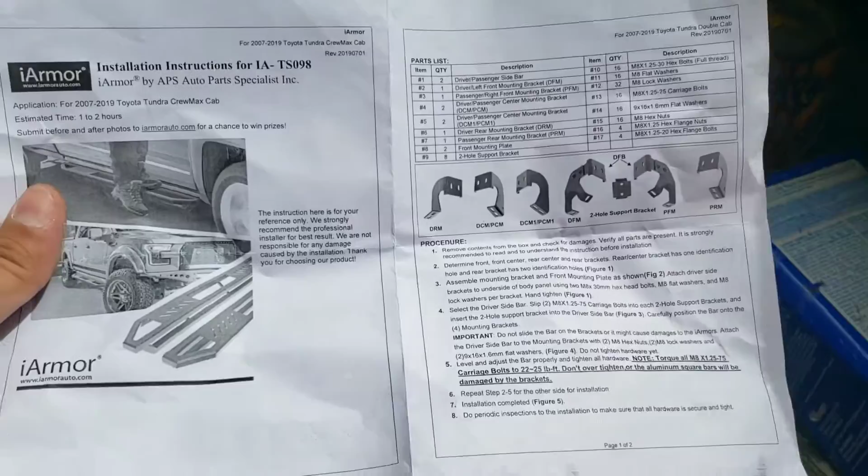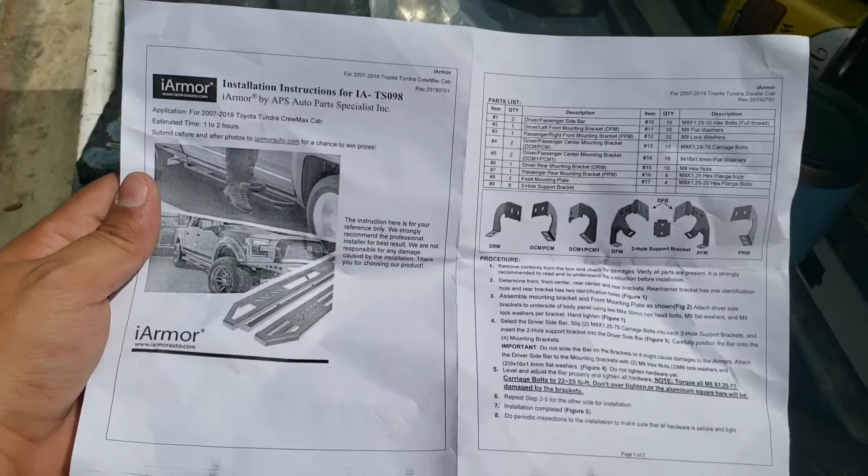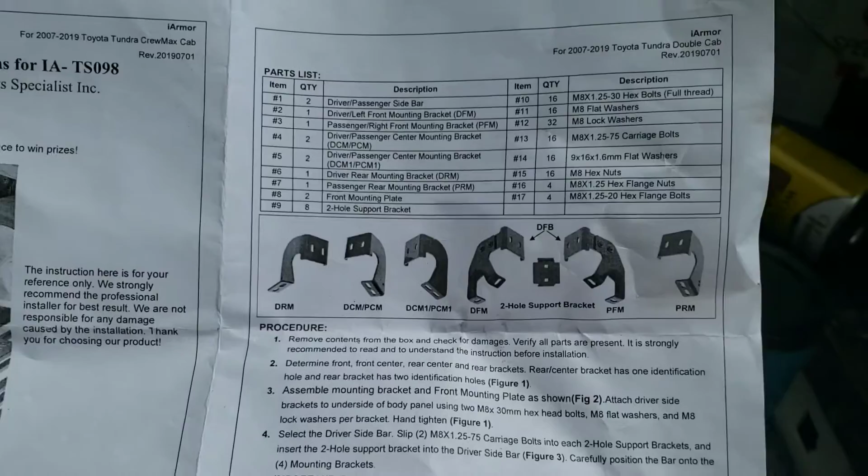Alright guys, so we got the instructions right here. It was inside one of those smaller boxes. So we got the 2 steps, brackets, and then I have all the screws here that we're going to need. So here are the instructions, and these are for a 2007 to 19 Tundra CrewMax. Make sure you got all the stuff, all the quantities that you need, and the instructions are there.

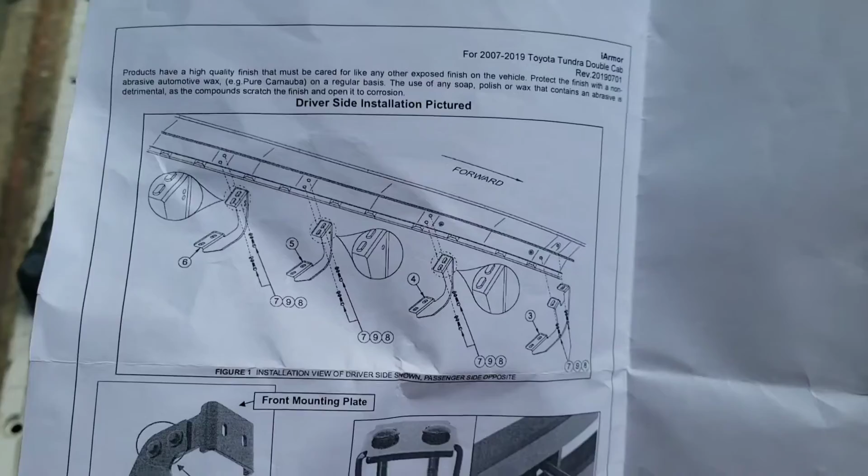And you flip it, you'll be able to see how it goes to the front side and how the front mounting plate goes. I'm pretty sure the install is very similar to the Silverado ones that I put on the other truck. So we're going to go ahead and assemble the front bracket plate and go under the truck and see how they're going to go.

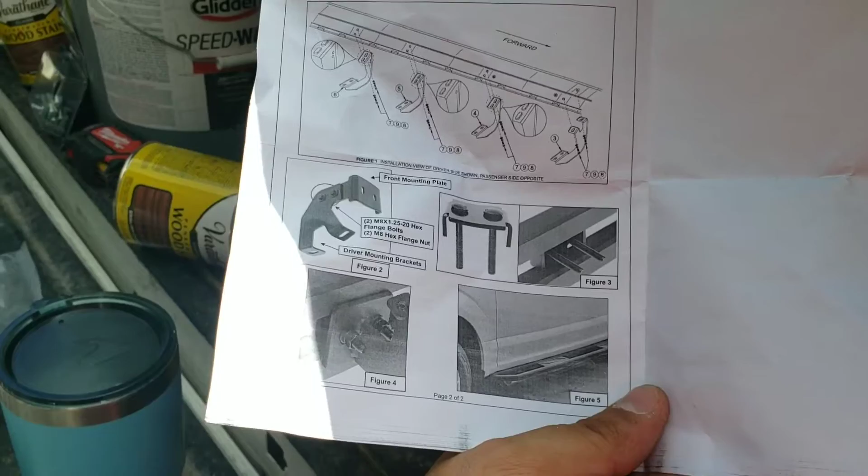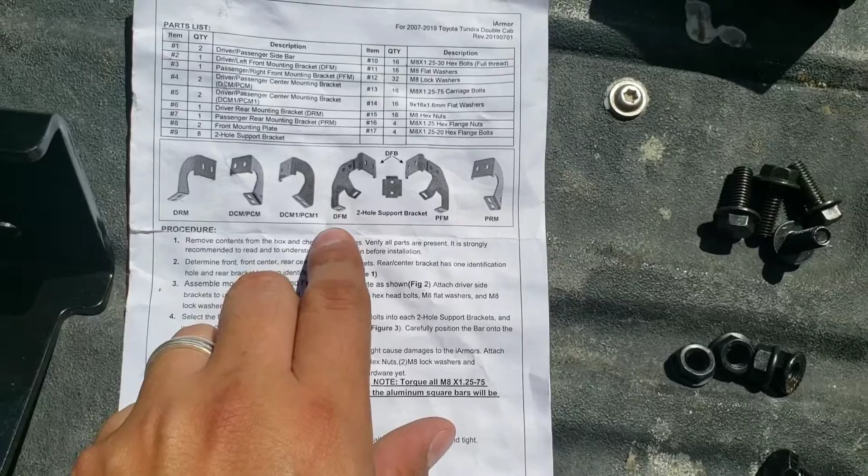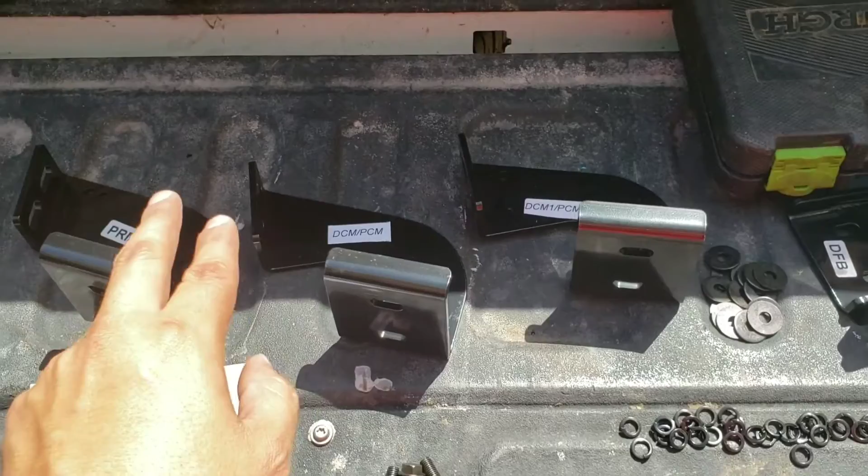Alright guys, I separated all the stuff, all the bolts, nuts, washers, locking washers that they included. First things first, we're going to assemble the front 2 brackets. I had already put them all in order: driver's rear, driver's middle, back, or either one of those. I don't remember which one's for the back, but one of those 2. I think they specify which one it is by the little hole they put on the bracket. The one for the front is 2 pieces. Same for the passenger side: passenger rear, middle, middle front, and front. So what you're going to need is 2 bolts of these per side.

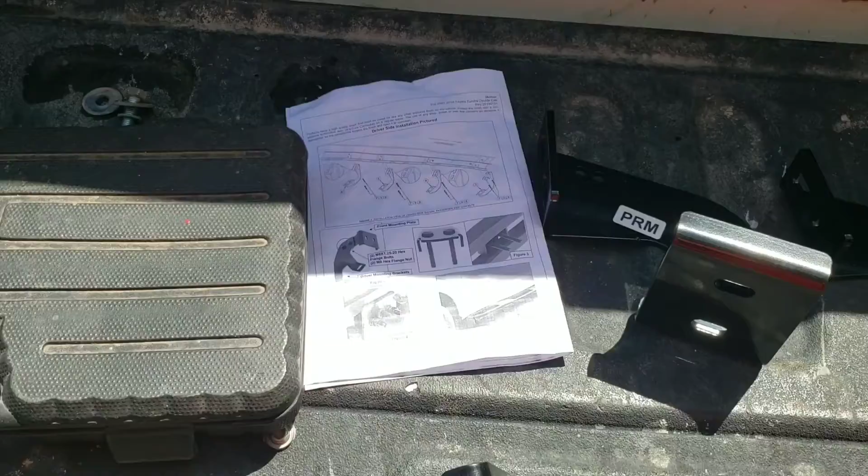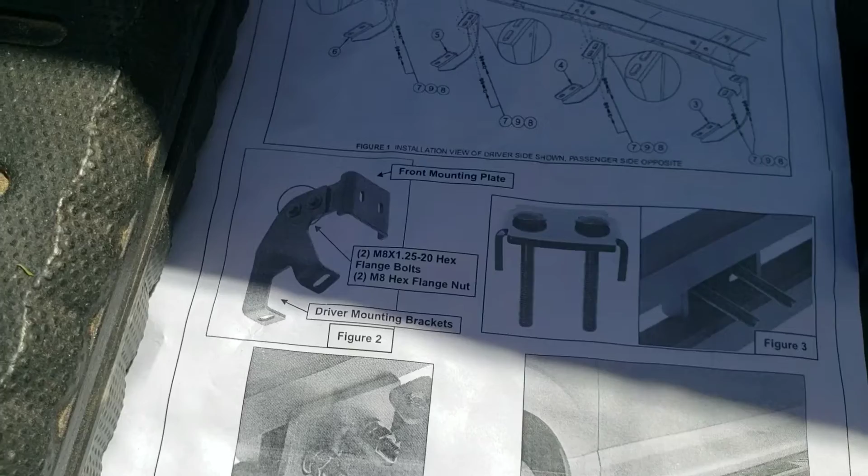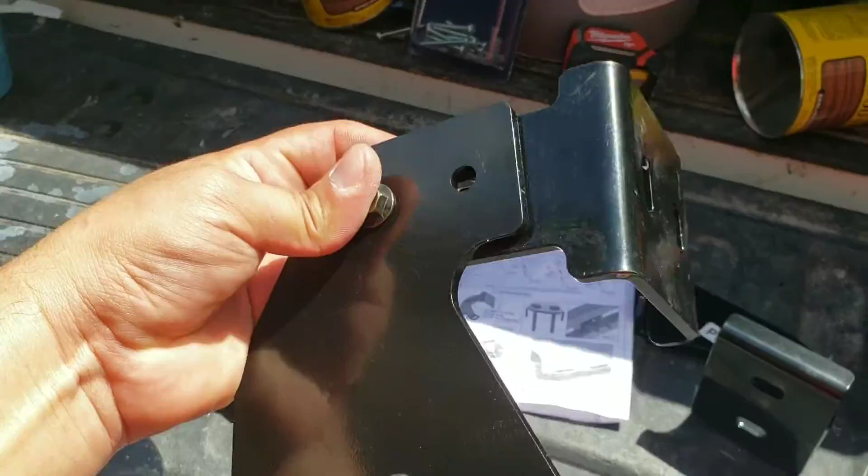Alright, so we're going to assemble the front bracket like it shows there for both sides, with 2 M8 by 1.25 20 hex flange bolts and the 2 hex flange nuts. So you're going to have your bracket like so. You're going to put your bolt in there, and grab one of those nuts per bolt and tighten that up.

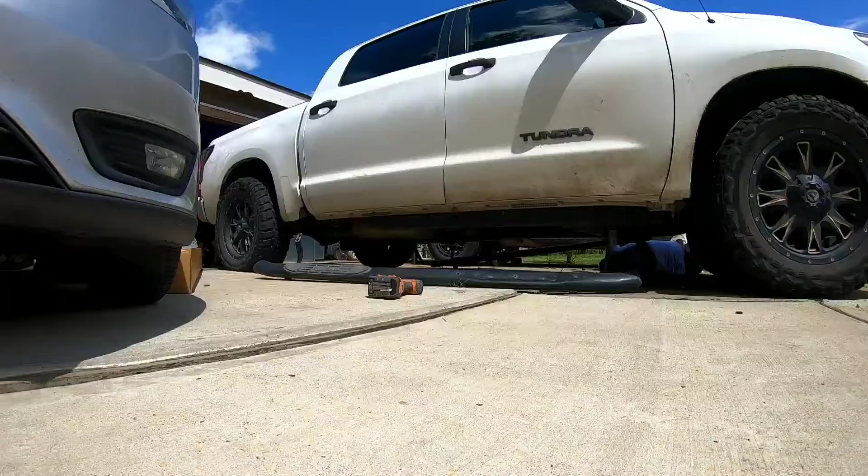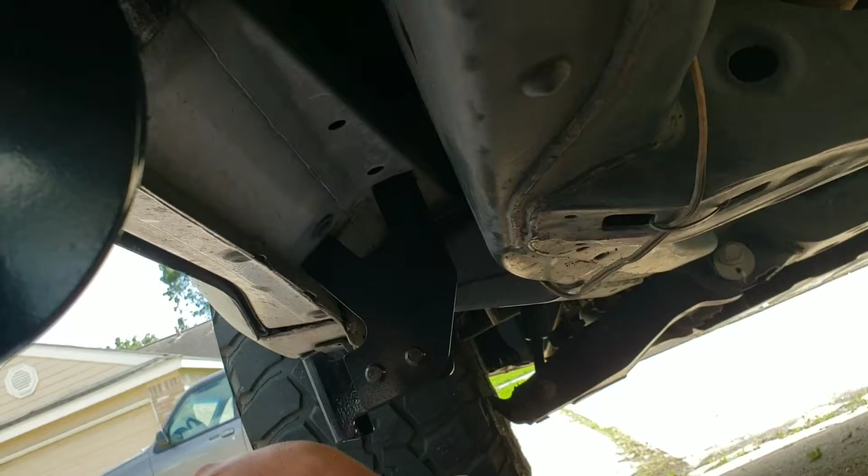Alright guys, we came to do the driver's side brackets. Here we have the furthest one to the back. The truck already comes with the nuts on the rocker panels. So you have the center one, and then you have the other center one, and then you have your front bracket all the way over there. I believe this one had the original bolts on there, so all I had to do was remove the original bolts and install the new bolts that came with the bracket.

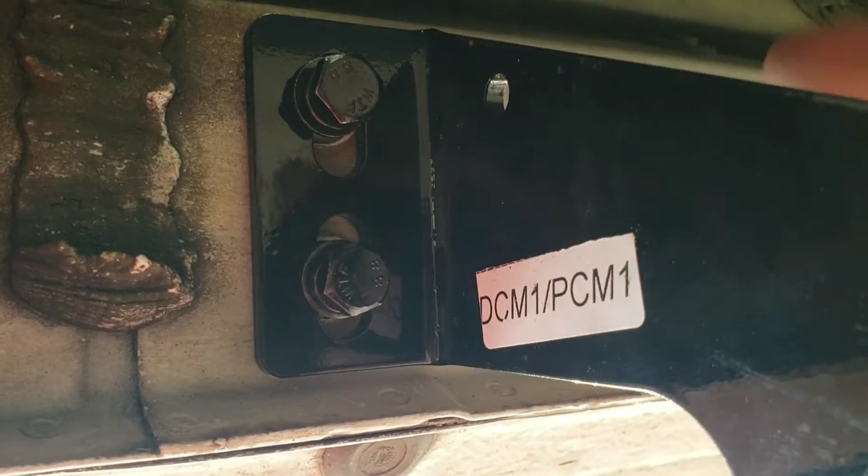So now we have the step here. We're going to go ahead and mount it on, bolt it. We didn't tighten these ones all the way up, so they're still loose, so we can play around with the steps and put them leveled. We're going to go ahead and mount the step and then tighten everything up.

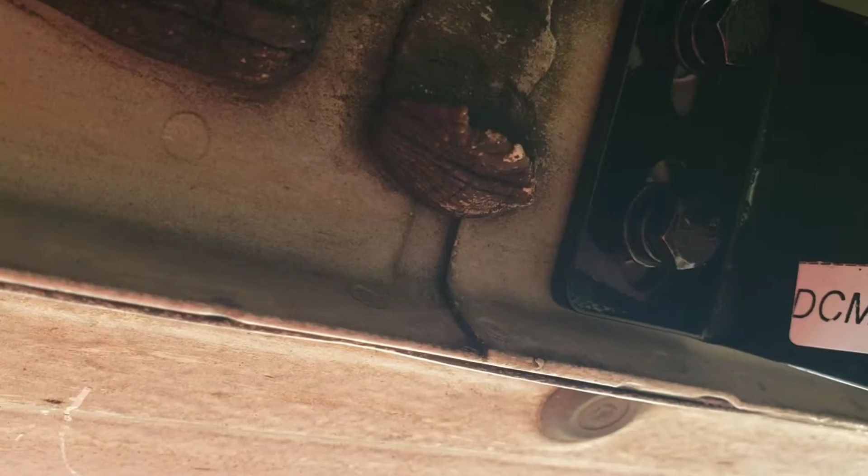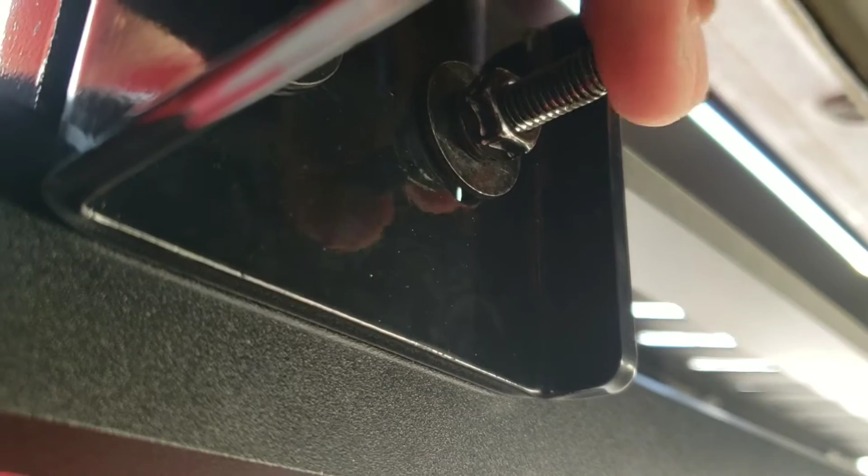Alright guys, so we got the driver's side finished up. You use the 2 long bolts to hold it, going from the front bracket to the back on all sides. And once you got it all kind of level, how you like it, you can scoot it further up or down using these screws.

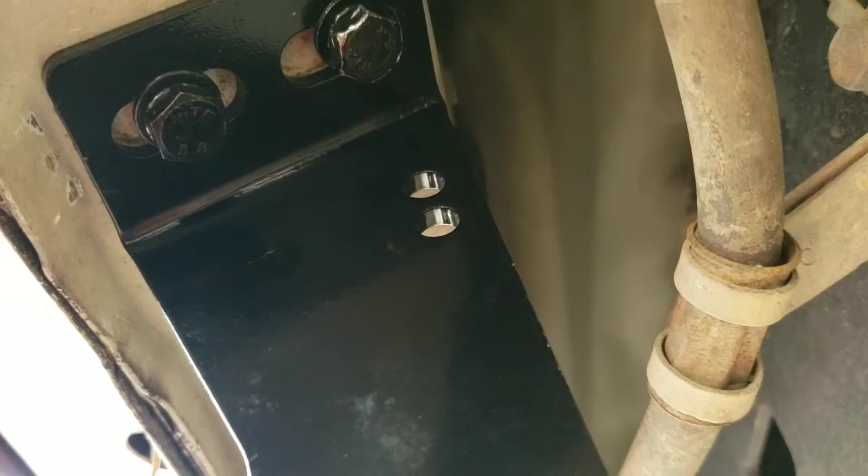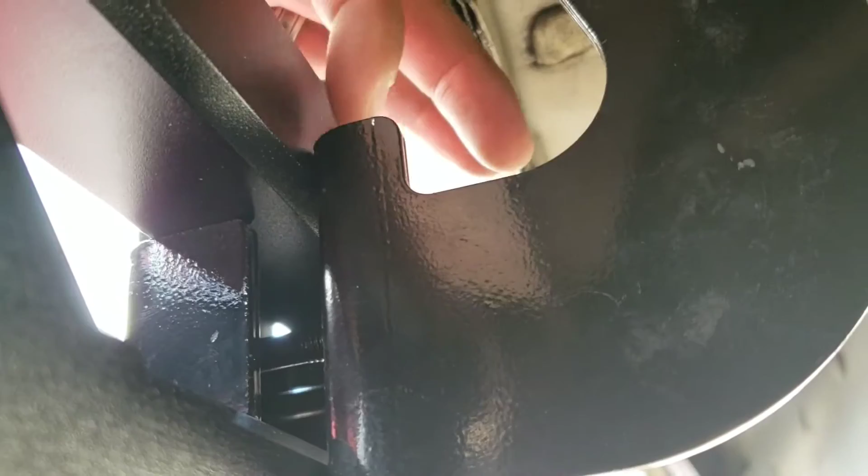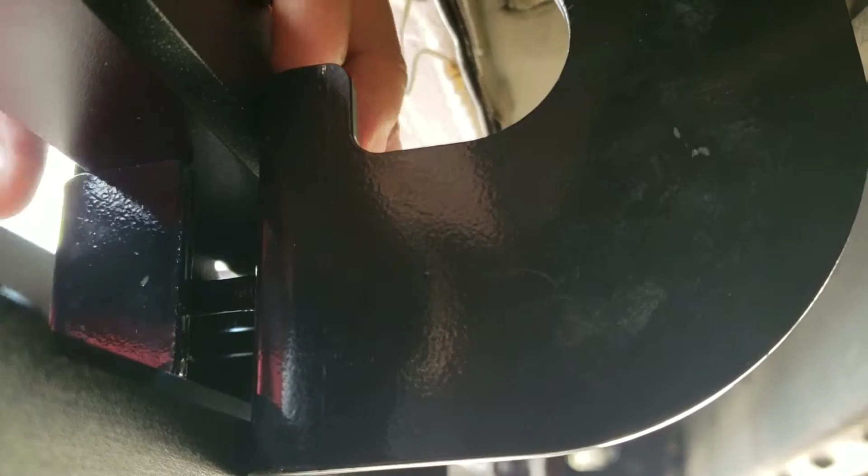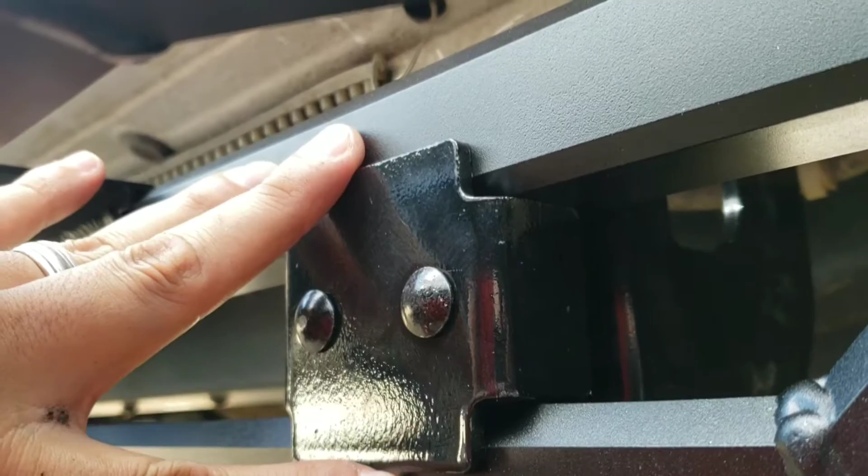And then what you've got to make sure is that the back bracket is touching both the top and bottom rails and is not falling into the inside of it like this, because then your step is not going to be leveled and it's not going to grab on good, it's always going to be loose. Same with the bracket on the front side—make sure that it's grabbing both top and bottom rails. That way it's more secure and it will look like this.

Now we're going to go on and do the other side, and I'll show you guys the final product.

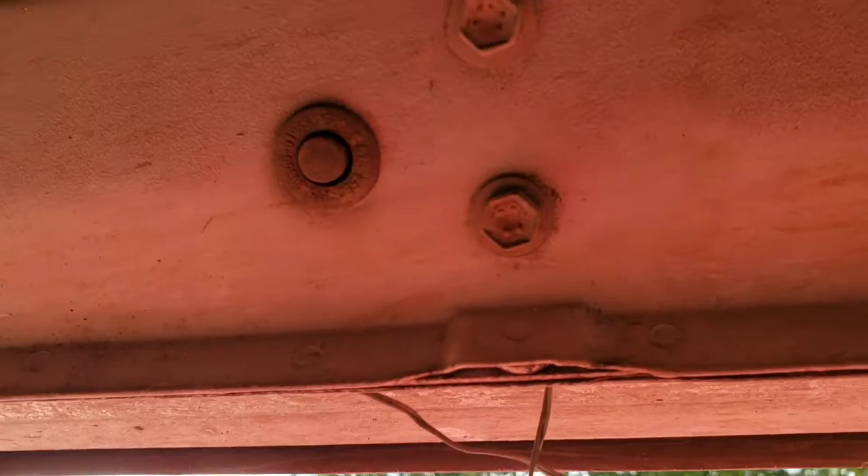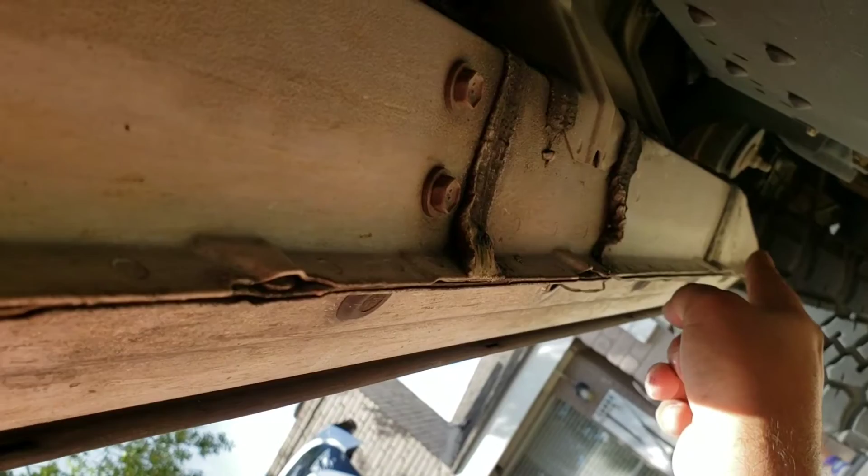Alright guys, we're on the passenger side, and this is what I was telling you about. You see the rocker panel came with the bolts already installed, so we're going to remove those on both the center ones. The back ones didn't have any because of the previous brackets, so we're going to remove those. We already got the front in there a little bit, still very loose, I just hand-tightened it, but you'll see what it looks like. So we're going to go ahead and remove those bolts and install the rest of the brackets.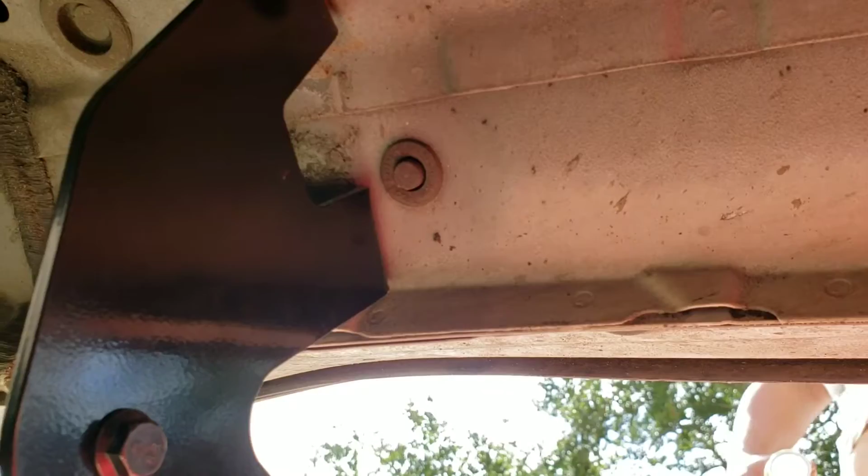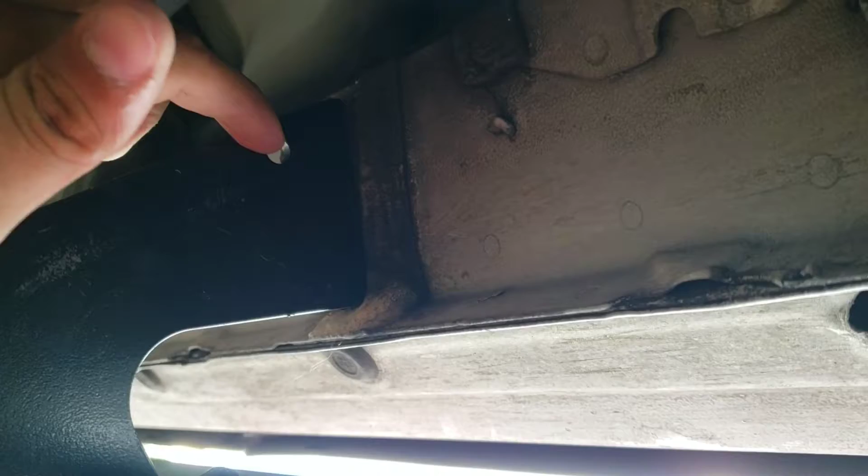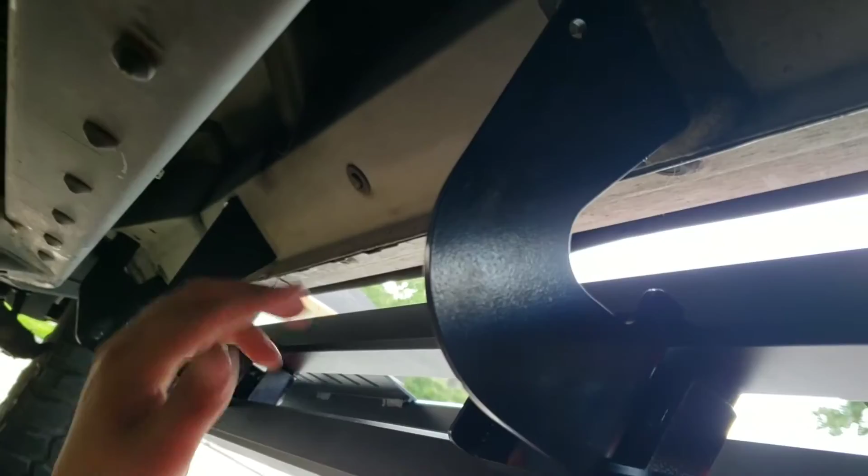Alright guys, so we got all the driver's side attached. I don't know if the instructions mention it, but when you're installing them, make sure that the middle bracket, the one with the hole here, is the one further back, closer to the rear tire, because I think the angle on them is slightly different. So what we did, we put them the other way, and we were having a gap on this further middle back bracket. Once we switched them, everything was good. So let me show you guys what they look like.